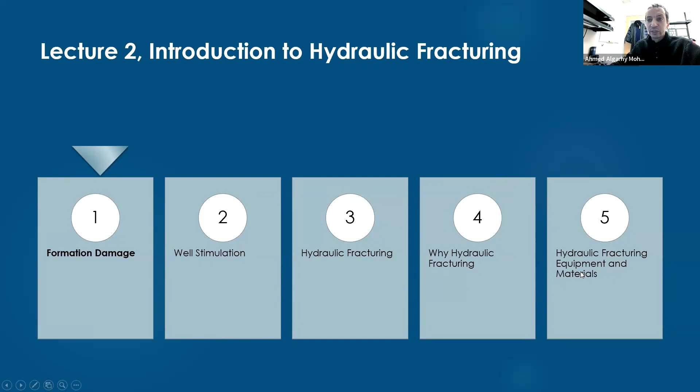Okay, and I will show what are the conditions to give this recommendation. So today I will explain to you what is formation damage, what is well stimulation, what is hydraulic fracturing, why we do hydraulic fracturing, and finally a general idea about hydraulic fracturing equipment and materials we are using.

He may have COVID, he may have a virus or bacteria, and now he's sick. So I need to know what is the name of the disease, also what are the symptoms of the disease. Are you coughing? Do you have a fever, or what? Also, I need to diagnose the disease. Maybe I will ask you to do some blood testing, or maybe a scan or whatever. At the end, as a doctor, I will give you the medicine.

Okay, let's copy this for oil and gas. The petroleum engineer is a physician, a doctor. Your reservoir is your patient. You have a reservoir or a well, and that well used to produce 500 barrels a day. And today you find this 500 become 200 or 250. So your well lost 50% of the production. So for sure your well now is sick, is not in good health. So your job as a petroleum engineer is to figure out what is wrong with that well, and you need to write him a medicine.

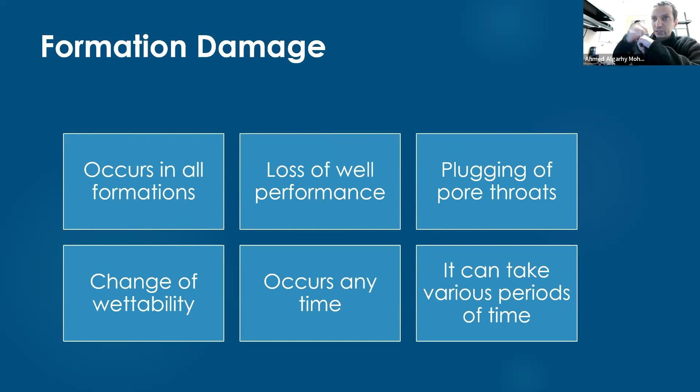So changing the wettability by mistake - if you have a reservoir that is water wet and you injected a chemical or did something wrong, and now it becomes oil wet, it means this reservoir will keep the oil inside and produce water instead. And this is not what we want. We are petroleum engineers, not water engineers, right?

Also, formation damage may occur at any time, similar to a disease you may get. Guys, I'm healthy today. I don't know what will happen to me tomorrow. Maybe I will become sick tomorrow, maybe I'll get flu or a cough or COVID or anything. So it may happen like a disease - formation damage, like any disease, may happen at any time.

Also, it can take various periods of time. I may get this problem for one day, or get it for one week, or one month, or I may get it forever.

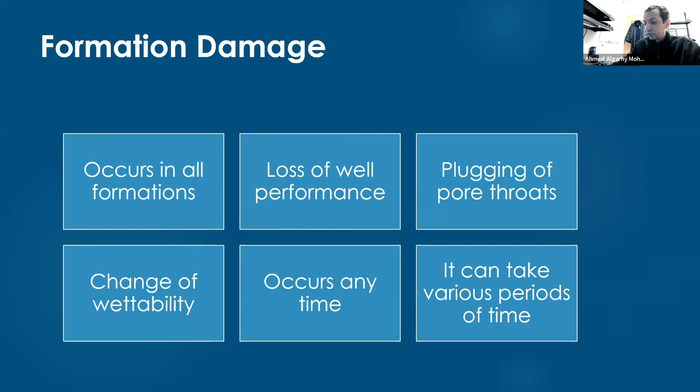So formation damage can be because of a simple, single reason, or it may be because of multiple things. I may get only one disease, but remember, for old people - let's say your dad or granddad or mom - whenever they get above 50, they start getting a lot of diseases, like high blood pressure, diabetes, and others.

So they have a group of diseases. For a reservoir or a well, maybe we have the same situation. I may get one type of formation damage, or a combination of 2 types, 3 types, or 5 types. All these things may happen.

But the general recommendation is it is always better to avoid formation damage than to treat it. Guys, every day you go to college, or every time you travel, your mom gives you a phone call and asks you to wear good clothes that will keep you healthy, and she takes care of you so you don't get a cold or the flu or something like that. So it is better to stay healthy than to get sick.

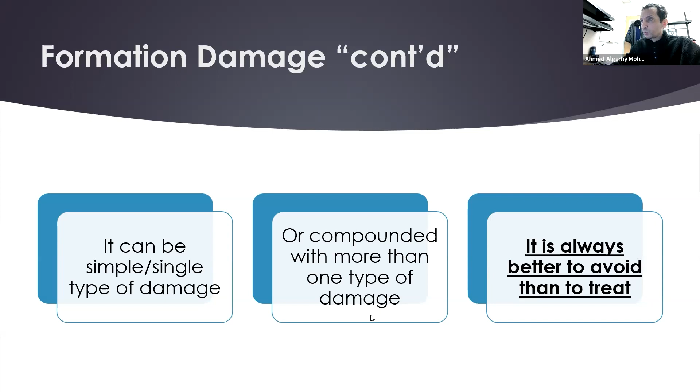And now we are trying to find you a doctor, or trying to find you a medicine. So please try to keep your reservoir, try to keep your wells healthy, without any type of formation damage.

Okay, how to identify a formation damage? Now we have a formation damage - how to identify it? One of your family is sick today - how do you know that? You tell me, hey, he has a fever. I get the thermometer and check the temperature, and his temperature is 39 Celsius instead of 37. So I use this thermometer to identify if there's something wrong with that guy or not.

So I will notice my well is not producing as usual - there is a loss of well performance. I can run a PLT, a production logging tool. This tool I will send down on a wireline, and it will go downhole and tell you exactly what is going on down there. So if there is any problem with the perforation, or any problem with the tubing itself, you can see that using a PLT or production logging tool.

Also, I can get a sample and see - maybe I have a special type of scale. Scale is a deposit, something that will deposit in the tube and may plug it. So if I get a sample, I may identify that type of scale.

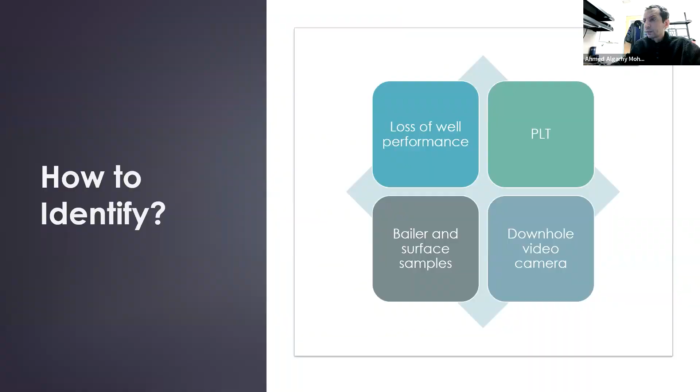Formation damage is not something measurable directly. It's similar to a quality, or lack of quality, that you want to measure. Let's say you have a headache or a pain - I know you have a headache, but I don't know how severe it is. So I need a scale or measure to know exactly how the headache I'm having compares to the headache you have. If I want to compare my pain with your pain, we need a scale for that, which is not something easy.

Here in the United States, if you go see a doctor and tell him you're having a severe headache or pain in your arm and chest, he will ask you on a scale from 0 to 10, how is your pain? If I'm not having any pain, I'll say it's 0. If I have very bad pain and cannot even sit down, sleep, or talk, I'll tell him the pain is 10. He tries to help me by giving me a scale, and now I'm trying to help him explain how bad the pain is, because the doctor will write a medicine for me.

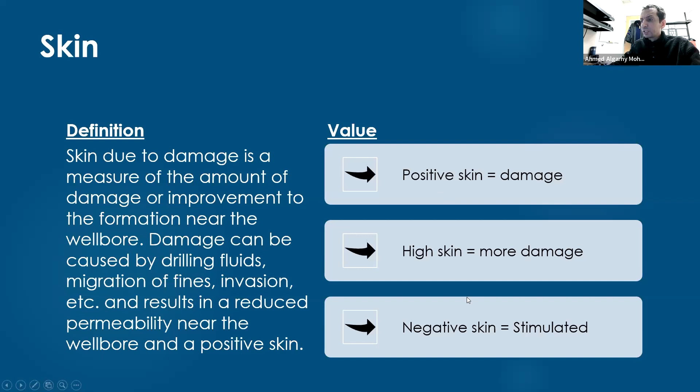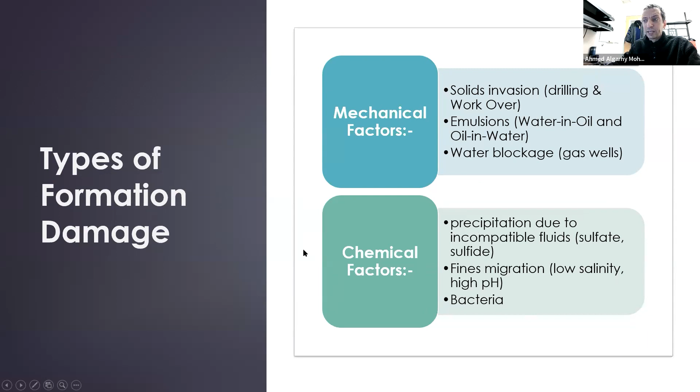Types of formation damage may be mechanical factors or chemical factors. Any solids invasion because of drilling fluids, completion fluids, or killing fluids, I would consider mechanical. Any chemical precipitations that may happen due to a chemical reaction, I would consider chemical factors or chemical reasons.

If I have solids inside the formation and these solids move inside the reservoir from one place to another place, but do not get produced and will not reach the wellbore, I will call this fines migration. Some clays or solids like to travel from place to place inside the reservoir without getting produced. If these solids reach the wellbore, I will call this sand production. So remember the difference: if the solid reaches the wellbore and gets produced, it's sand production. If the solid moves from one place inside the reservoir to a neighboring place without getting produced, it's fines migration.

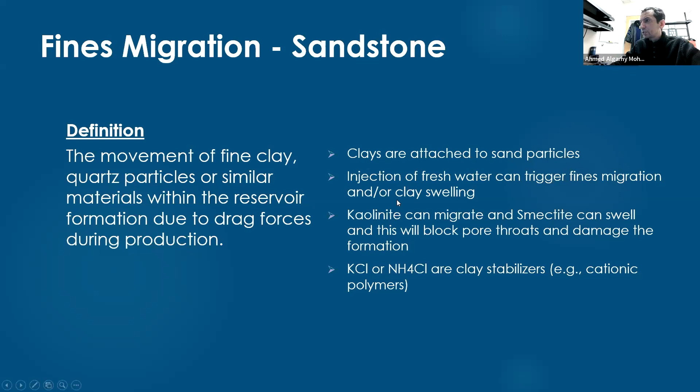Now let's discuss what well stimulation is. A lot of students get confused between simulation and stimulation. Stimulation in Arabic means tahsin. Simulation means muhakah. So simulation and stimulation are two different things.

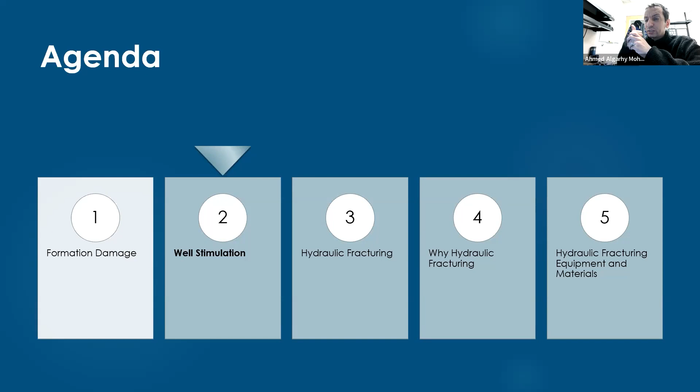Well stimulation means a technique I will do to make hydrocarbon production better. I want to increase or enhance my well productivity. This technique I will call well stimulation technique, meaning hydraulic fracturing, acidizing, or acid fracturing. All these techniques, if applied in the right way for the right candidate, may increase your production.

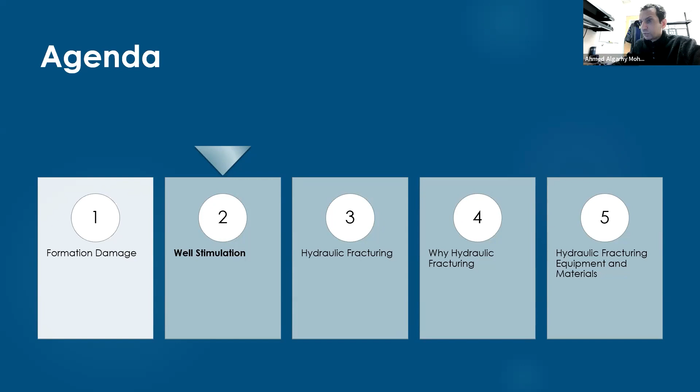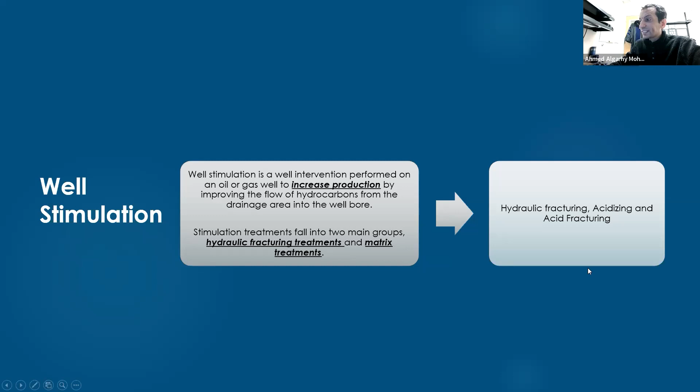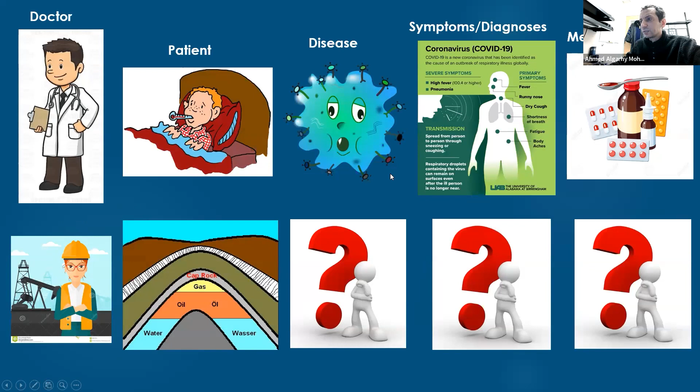So let's discuss what well stimulation is. Well stimulation is a well intervention technique we apply to increase the hydrocarbon production of a well. Whenever we say well stimulation, most likely I'm talking about hydraulic fracturing, acidizing, or acid fracturing. All of these are considered medicines or remedy techniques. Let's talk about hydraulic fracturing, because it is the main technique—we use massive hydraulic fracturing to fracture shale and produce oil or gas from that shale.

So hydraulic fracturing is very important to us. Hydraulic fracturing is a technique where I will inject frac fluid into my formation at a high rate. This rate may be 20 barrels per minute, or maybe 30, or 35, or maybe 60, or maybe 100 barrels per minute, based on the application you are doing.

This frac fluid includes a lot of chemicals—it may have cross-linker or breaker and many other chemicals, and I will show you a list of these very soon. Also, I will use this powder with it, called proppant. There are different types of proppant, and we use it mainly to keep the fracture open after you stop pumping.

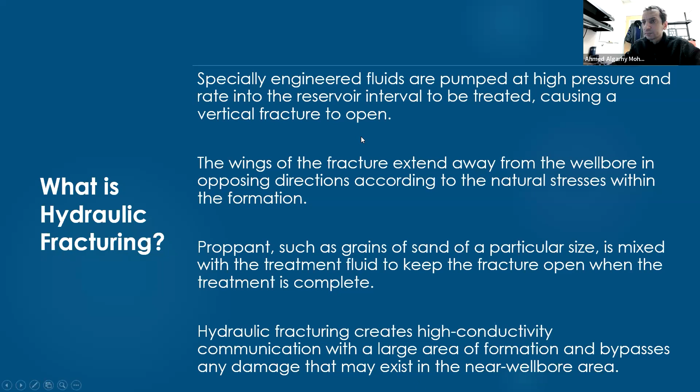This is my fingers, but the fingers in my foot, we don't call them fingers, we call them toes. So your foot has toes, and the back of your feet we call this heel.

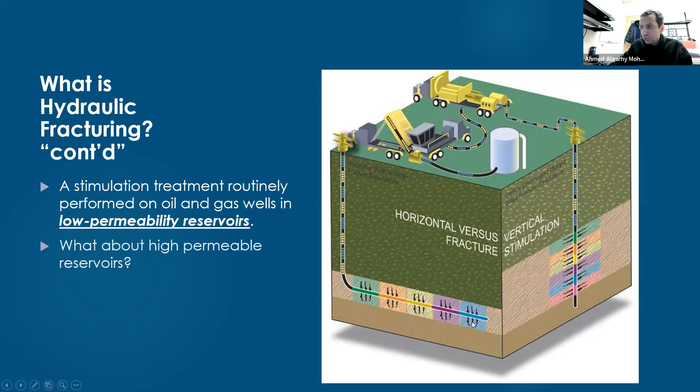I will start fracking from the toes here, near the toes. Then I will do this in one stage, then a second stage, third stage, and so on. Watch this video, and I will continue after we finish.

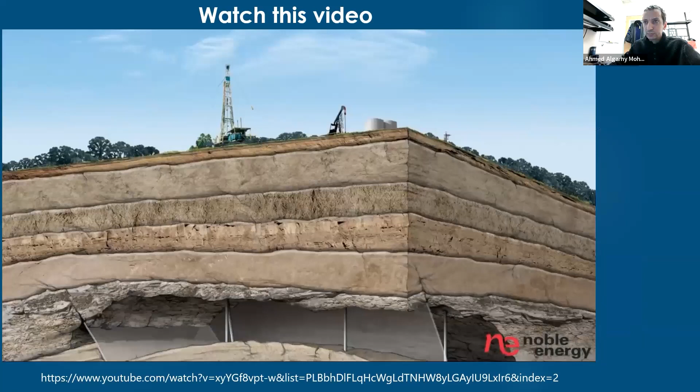There are many formations with oil and gas reservoirs that are vertically drilled and stimulated using hydraulic fracturing to optimally recover these hydrocarbons.

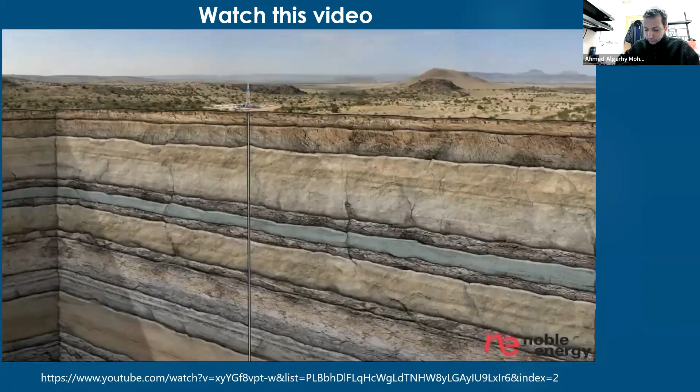In this example, we show a well targeting 3 sandstone layers, although this number may vary in different oil and gas plays. Once the drill rig and other infrastructure is in place, a bit mounted on the end of the drill pipe begins drilling the well.

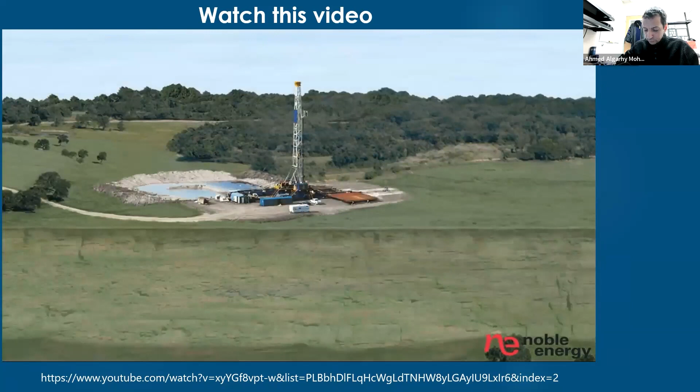The well is initially drilled to a designated distance below the deepest fresh water source near the surface.

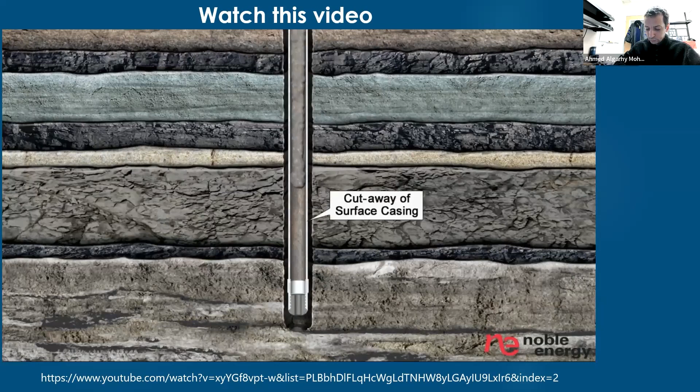The pipe and bit are then removed, and surface casing is inserted into the hole. The casing is then secured into place by pumping cement through the casing and through the shoe at the bottom of the hole.

The cement barrier and steel casing prevent any contamination of freshwater aquifers.

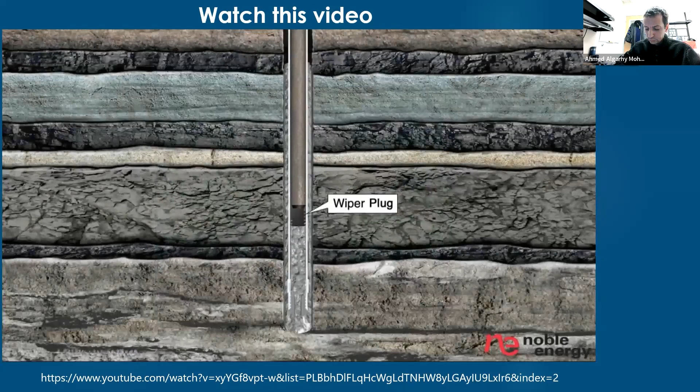Once the casing cement has set, drilling of the intermediate section of the hole continues by drilling through the wiper plug, shoe, and cement at the bottom of the wellbore and on toward the targeted zones.

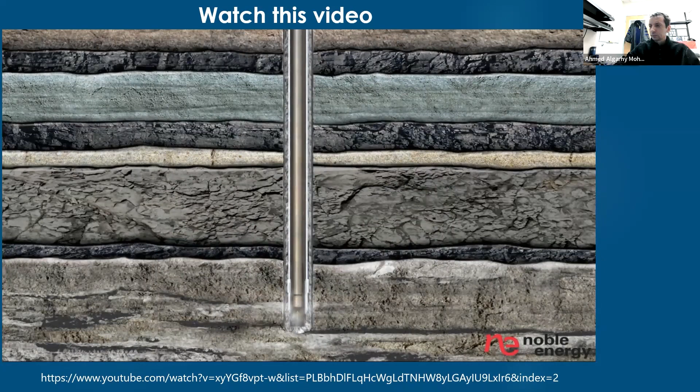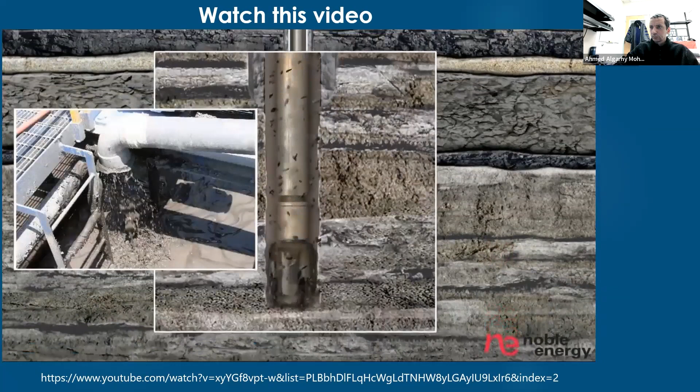Throughout the drilling, a mixture called mud is pumped down into the well through the drill pipe. The mud serves to keep the drill bit cool. It carries the cuttings to the surface and provides hydrostatic pressure, prohibiting formation fluids from entering the wellbore.

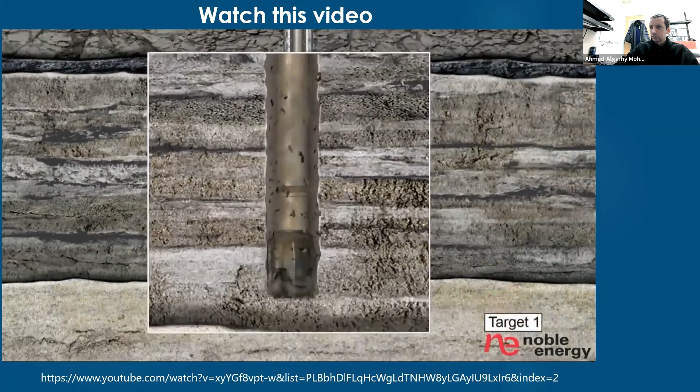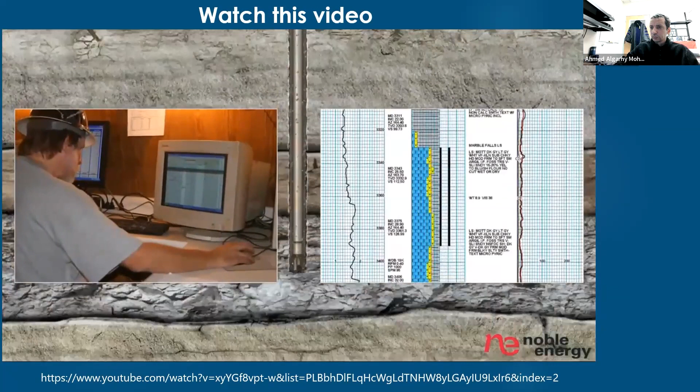As drilling approaches the depth of the first target zone, a technician called a mud logger is brought on location. He analyzes the cuttings, identifying the downhole lithology and any presence of hydrocarbons. As the well is being drilled, he provides real-time information to the company geologist and rig personnel.

Once the bottom of the intermediate section is reached, the drill pipe and bit are again removed from the wellbore, and intermediate casing is inserted into the hole and connected to the surface casing. The intermediate casing is also cemented to secure the hole.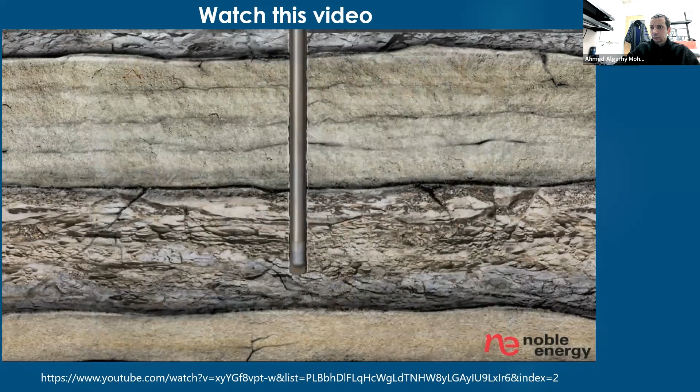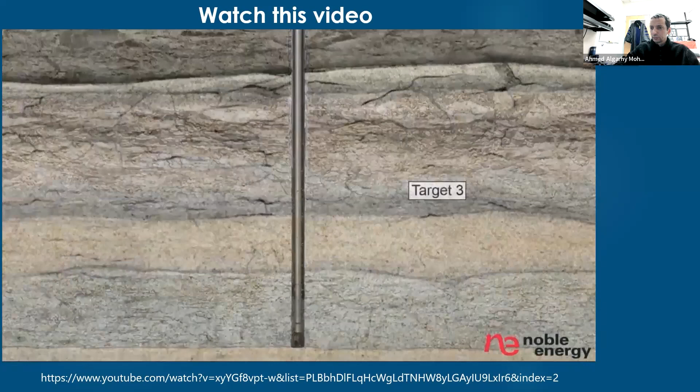The drill pipe and bit are again lowered back into the hole and drills through the wiper plug, shoe, and cement. Once total depth is reached, the drill pipe and bit are removed from the wellbore one last time.

Next, a logging tool is lowered to the bottom of the well on a wire line. As the tool is pulled back up the entire length of the well, data is gathered to create an electric log.

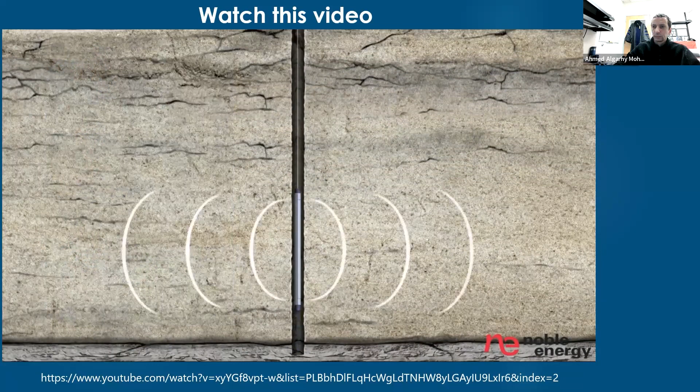Once the well has been logged and deemed a commercial well, production casing is then inserted. As with the surface and intermediate casing, the production casing is also cemented into the hole.

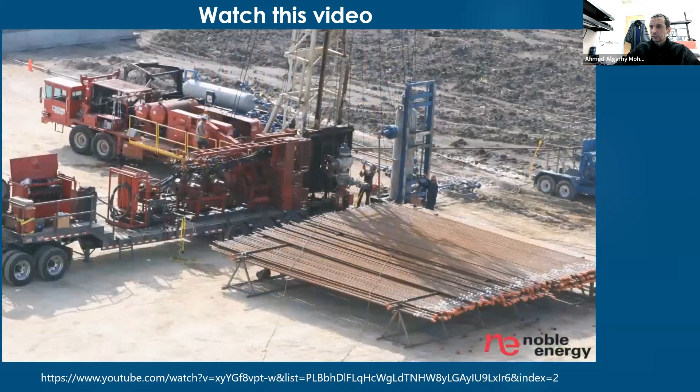Back on the surface, the drilling rig is no longer needed. A temporary wellhead is installed, and the location is prepared for the service crews who will ready the well for production. The first of these steps is to perforate or perf the casing.

A perforating gun is lowered by wire line to the lowest of the 3 target zones. An electrical current is sent down the wire line to the perf gun, setting off a charge which shoots holes through the steel casing, cement, and out a short distance into the target formation. The perf gun is then pulled out of the hole.

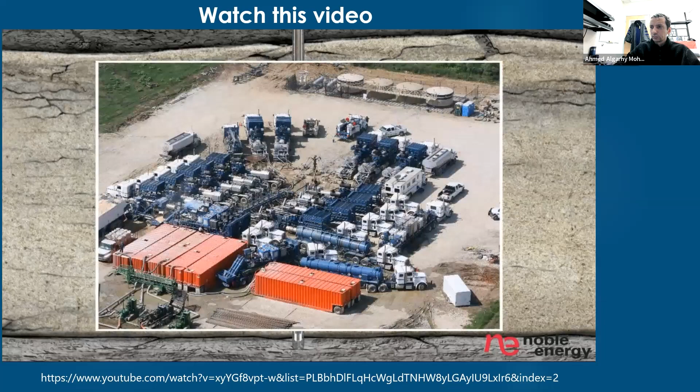The next step is to hydraulically fracture or frac the zone. Here, sand or other proppants are pumped into the wellbore under extremely high pressure. When the mixture reaches the target zone, the pressure forces it out through the perf holes and out into the sandstone formation, causing it to fracture.

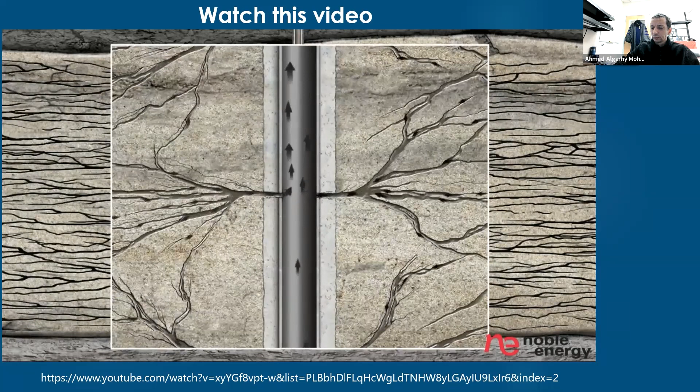This creates a pathway connecting the reservoir to the well and allows the released oil to flow to the wellbore. Next, a bridge plug is placed inside the production casing, isolating the fracked zone. The hydraulic fracture process is then repeated for zones 2 and 1.

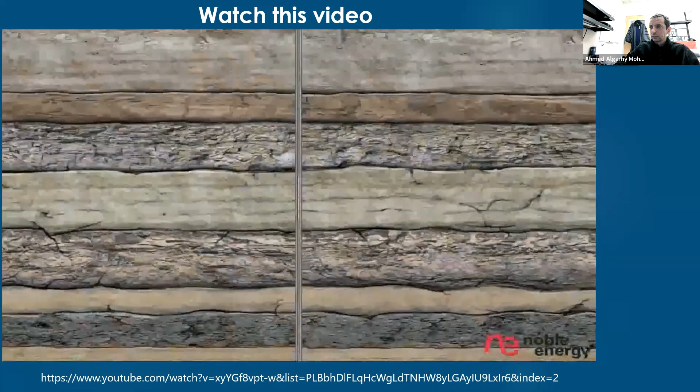Now that the frac process is complete, the plugs are drilled out and production tubing is lowered into the wellbore to reach each of the productive zones.

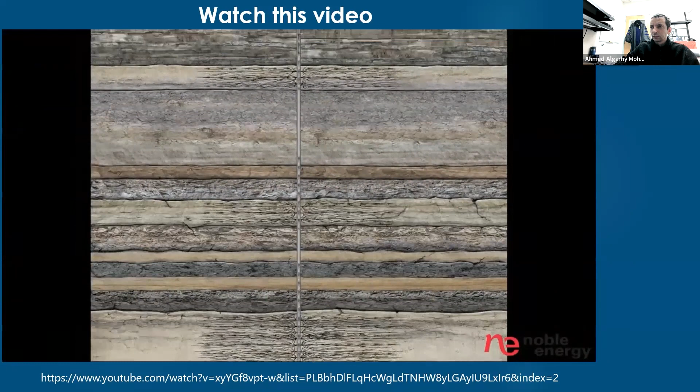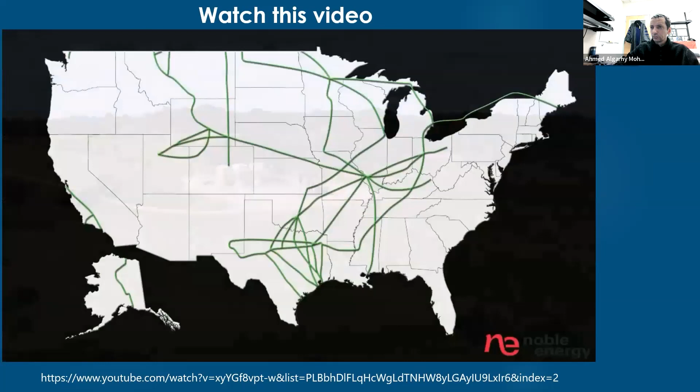Hydrocarbons can now flow simultaneously from each of the zones into the well. The next step is to install a permanent wellhead and other necessary surface equipment. Sometimes a pump jack is used to help bring the oil to the surface. The final step is to install and connect a pipeline to the well that will transport the oil to the nation's pipeline network. Wells that produce from several zones simultaneously result in greater cost efficiency and increased productivity.

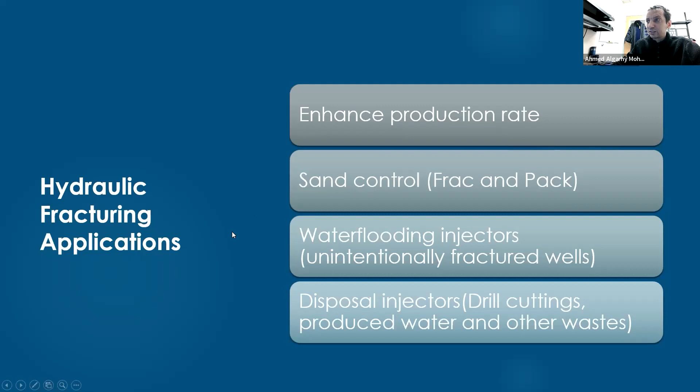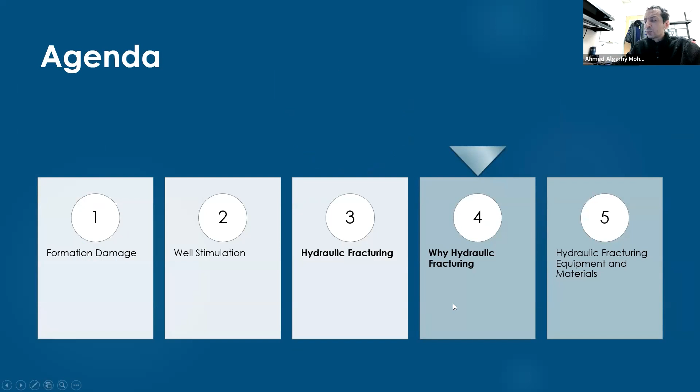Okay, I want to answer an important question before we finish today's lecture. Why do we do hydraulic fracturing? What is the reason that hydraulic fracturing increases productivity? So this gentleman, his name is Henri Darcy. Henri Darcy is a French guy. He was a civil engineer, and he got a project to design a fountain near Paris.

A fountain is a little equipment that water gets out of, it is 'nafura'. So this guy was planning to design that fountain, so he did a lot of experiments. He got a tube, and he started trying to get a relation between the injection rate of the water, the cross-section area of the tube, the length of the tube, the viscosity of the fluid, and the pressure difference between the two sides of the tube, the inlet and outlet.

And he introduced something called permeability. The K is permeability. This negative sign, forget about it, it's just showing the direction of the fluid moving from one side to the other. So Henri Darcy introduced an equation to get the relation between the rate, the injection rate or production rate, with permeability, cross-section area, the delta P or pressure difference, and also the viscosity of the fluid and the length of that tube.

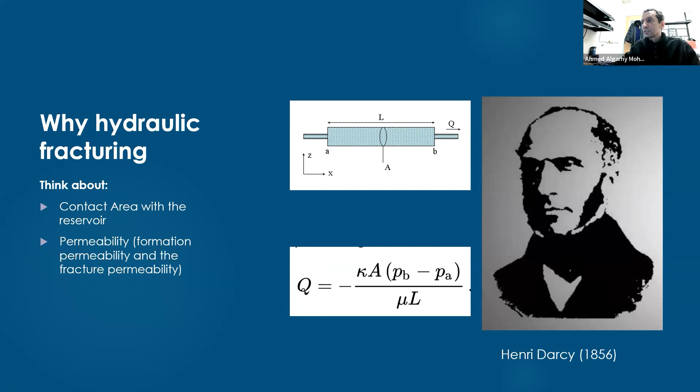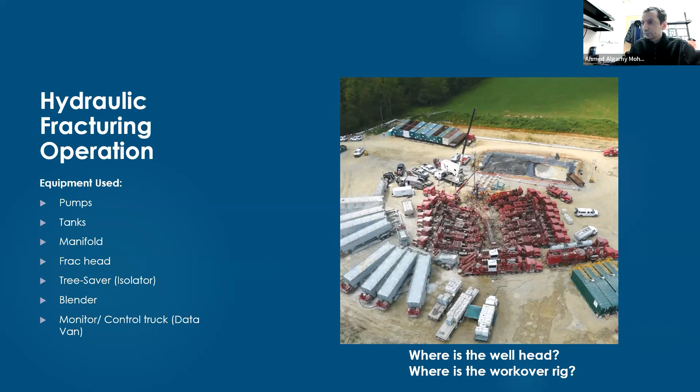Guar is something similar to starch. It comes in big sacks as a powder, and I will mix this guar. Guar is something similar to nisha - it is not nisha, it is not starch, but I'm saying it is something similar. Whenever I mix this powder with water, I will get something similar to milk. If I add a chemical called cross-linker, it will become very, very viscous.

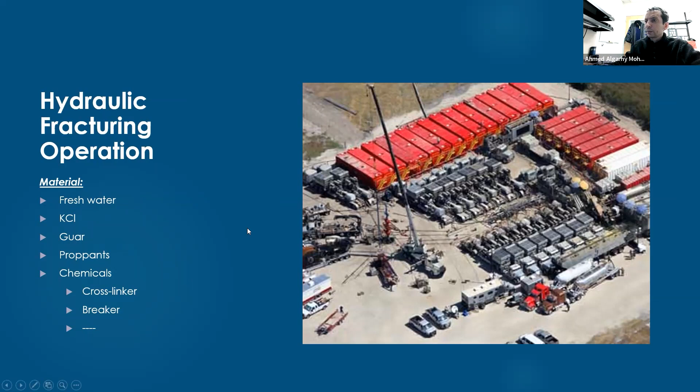There's a lot of other chemicals we are using. Let's keep going. Here is a list of the chemicals I may have. In this case, I have 90% water, more than 90% water. I have about 9% sand - sand here means proppant, guys please don't get confused, this thing we call proppant or we call sand. And this little thing, something less than 0.5%, is the chemicals I'm using.

These chemicals may be scale inhibitor, maybe pH adjusting agent, maybe breaker, maybe cross-linker, maybe iron control, maybe corrosion inhibitor, maybe biocide, maybe acids, maybe friction reducer, maybe surfactant, maybe KCl. All these things together are less than 0.5% of the frac fluid I'm using.

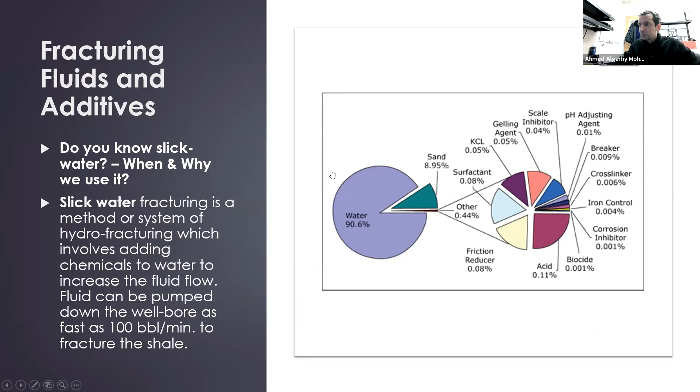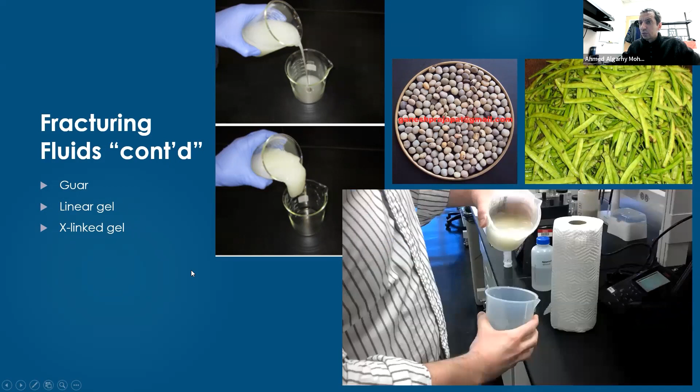I believe last lecture I explained what slick water is. I told you, if you break down, if you fracture, if you part the formation into two pieces, and you stop pumping, the formation will return back again because there's a lot of stress inside this formation. So after you stop pumping, to keep this fracture open, you need to inject this proppant with it.

I have different types and different sizes of proppant: 1630, 2040, 3050, 4070. We have different types, and if you want to know the difference between them, you can ask me a question in the Q&A section. I'm discussing some stuff quickly because I know this is not a hydraulic fracturing class. This is just an introduction to what we will do in shale, in developing shale.

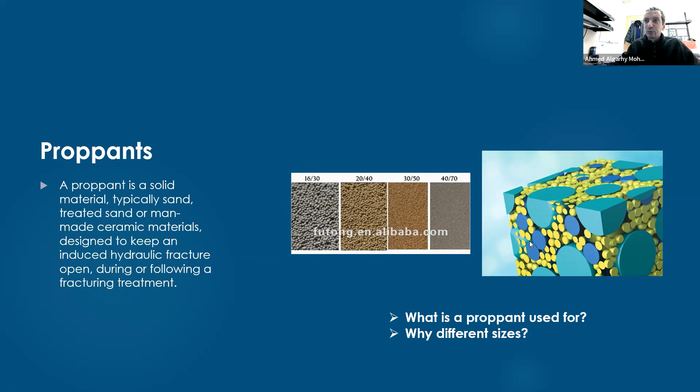Okay, can we answer the questions in the Q&A section? So you don't want to select, you want to ask me all of them? Okay, no problem, I can go and check, because sometimes there are a lot of questions that aren't technical. Yes, there's a question.

The effect of rock mechanical properties on fracture conductivity. Okay, this is a very interesting question.

So Merna, please keep trying to find technical questions until I finish answering this. Mechanical properties have a very close relation with fracture behavior. For example, if I have a formation that has very high Young's modulus, and Young's modulus and Poisson's ratio are both mechanical properties, then whenever I frac this formation, I will get a very narrow fracture. If the Young's modulus is low, let's say less than 1 million psi, the fracture will be a little bit wider.

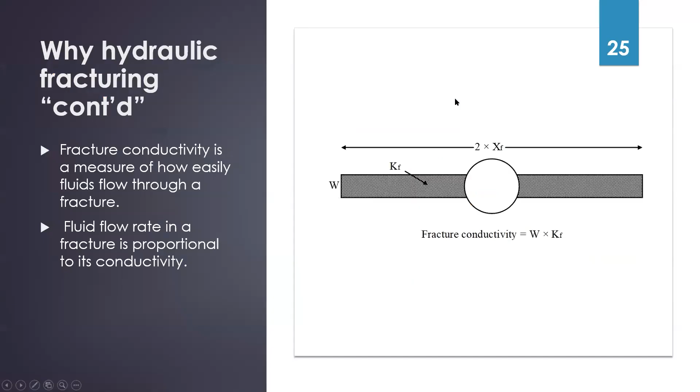I'm sorry. Okay, this is very important for anyone who wants to understand the concept of hydraulic fracturing. Guys, everybody knows what is a highway.

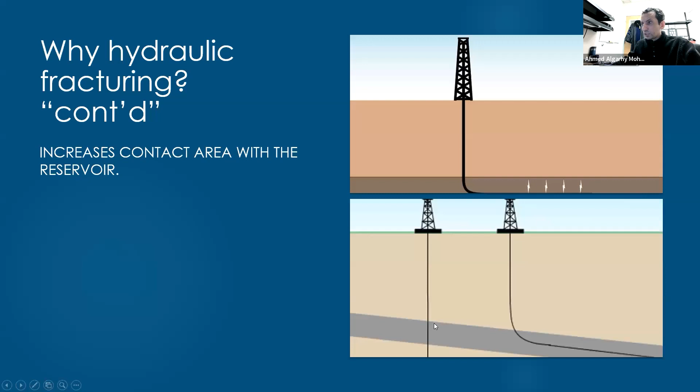Acidizing and fracture acidizing. Okay, so let me explain it. It's a very good question.

Guys, you know hydraulic fracturing. Hydraulic fracturing, I'm injecting a fluid at a high rate, and this high rate or this fluid will build a pressure, and this pressure will break down, will hammer the formation and crack it and make it two parts. So I'm doing this using a frac fluid. So I would call this hydraulic fracturing.

If I'm doing hydraulic fracturing, but I'm using acid like HCl, for example, if I'm using acid to frac the formation, I will call this acid fracturing. So acid fracturing is a hydraulic frac job, but using acid fluid instead of a normal frac fluid. And in this case, I will not use proppant.

But it is a long story because maybe we need to explain this in a lecture, not in a couple of minutes. So maybe in the future, I will do 1 or 2 lectures about acidizing, and you can attend them. But the main difference with acid fracturing, I will frac the formation using acid similar to HCl, for example. I wish this was helpful.